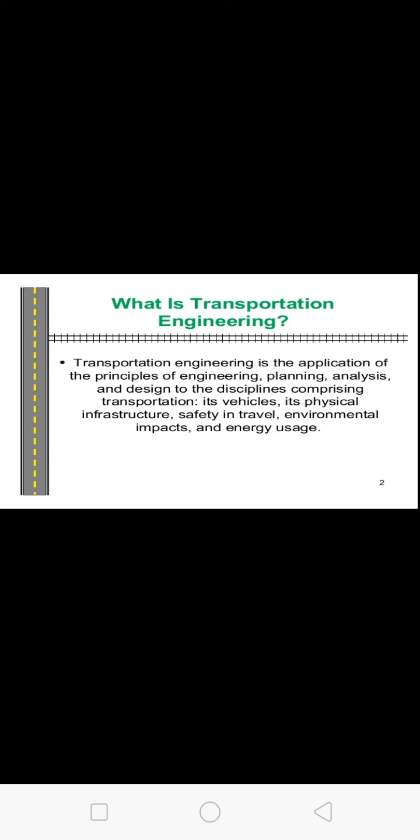Okay, going through here, the role of transportation.

The main role played by transportation is that every product needs to be transported, whether agricultural products or manufactured goods.

Whatever it may be, every product needs to be transported to a certain distance or to particular places.

Next point: better systems can provide easy access and benefits of low costing of products.

If there is no proper transportation or proper route for agricultural farmers or for manufactured goods, and no proper transportation to a particular area, the necessity would be high in that area.

So that will also increase the demand, and where demand and necessity rise, the cost of that good also increases. So a better system can provide easy access and benefit of low costing of products.

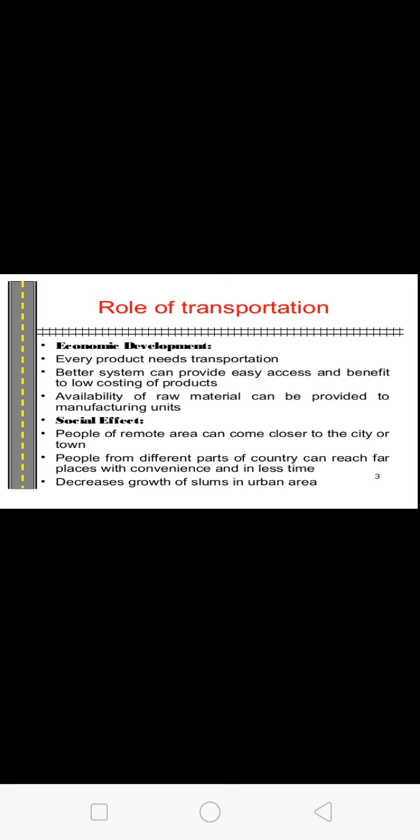Okay, going through other effects of transportation: it helps maintain law and order in the country. Obviously, if there are any discrepancies or clashes between groups or communities, law and order can be easily maintained.

Next, we can supply ammunition and manpower fast and easily. At the borders, for border security forces, if the routes are not proper,

the routes are not sufficient for reaching far distances quickly. If any attacks are made on us and proper routes are not available, it becomes difficult to supply ammunition, gunpowder, firepower, and manpower.

So if transportation is available, whether airways or any other mean of transportation, it allows quick and easy access to carry ammunition and manpower to that particular area when needed.

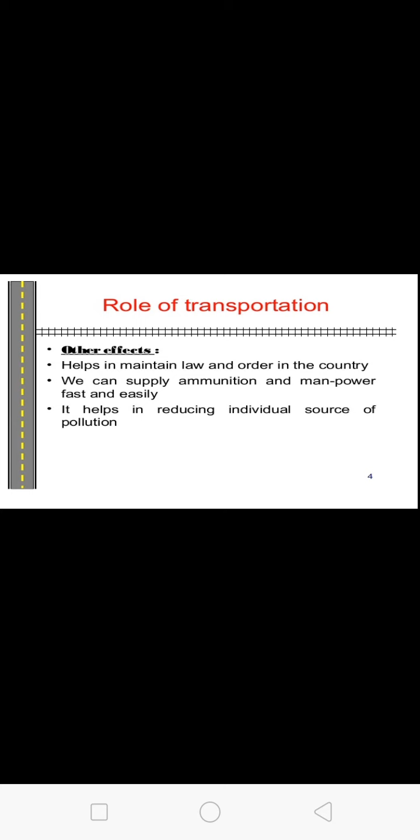Next, going through the role of transportation in national development, and how transportation is useful or plays a key role in national development.

First, economic growth. We can easily access goods or raw materials for manufacturing industries, for agriculture or farmers to sell their goods, or for mini scale industries. So if the transportation is available and made much quicker, there will be an economical growth automatically.

Next, place utility of goods and time utility of goods. Some goods will expire too soon and some may take some time, like processed food products. Consider time utility of goods, like dairy products or daily basis vegetables - they are too soon to expire. If the transportation took too long for sellers to sell their goods, there will be a lot of waste, because the goods will be wasted if transportation took too long for buyers to buy and sellers to sell their products.

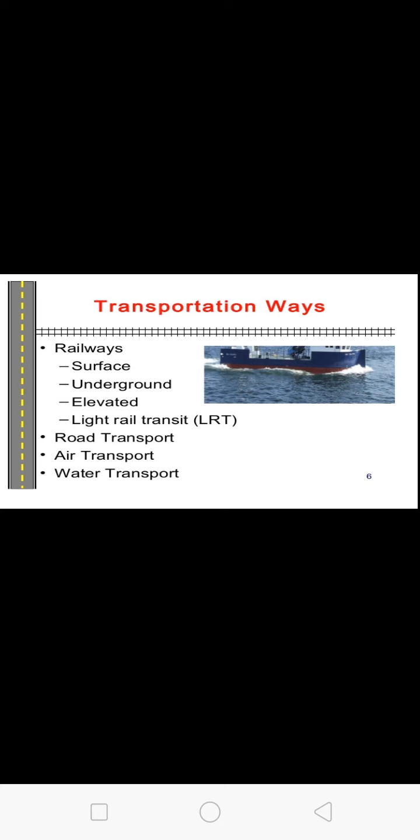Roadways. The classification of roadways are national highways, state highways, major district roads, other district roads, and village roads.

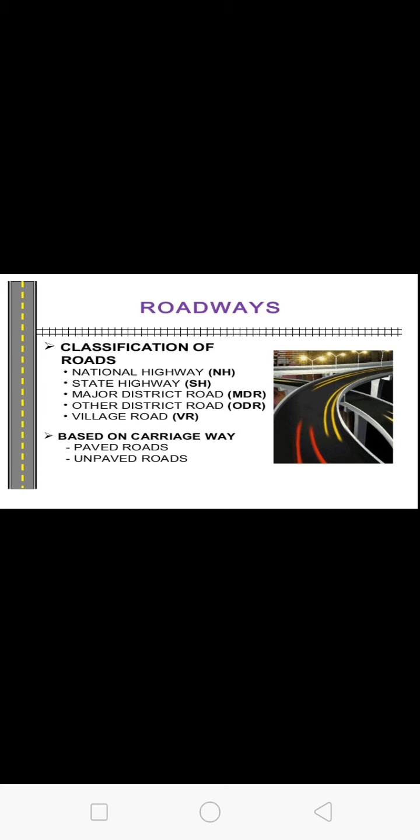Next, national highways. Their main aim is to run through the length and breadth of the country. They connect national capitals to state capitals, major cities or towns, and border areas. National highways should have at least two traffic lanes, excellent strength to carry heavy traffic, and a good surface finishing. The construction and maintenance of these roads is usually carried out by the central government itself.

Next, state highways. These are main roads running within the states. They connect important towns and cities of that particular state with the national highways. These are generally one lane, but two lanes are preferred, same as national highways. They have modern type bituminous or concrete surfacing. The construction and maintenance of these roads is usually carried out by the state government itself.

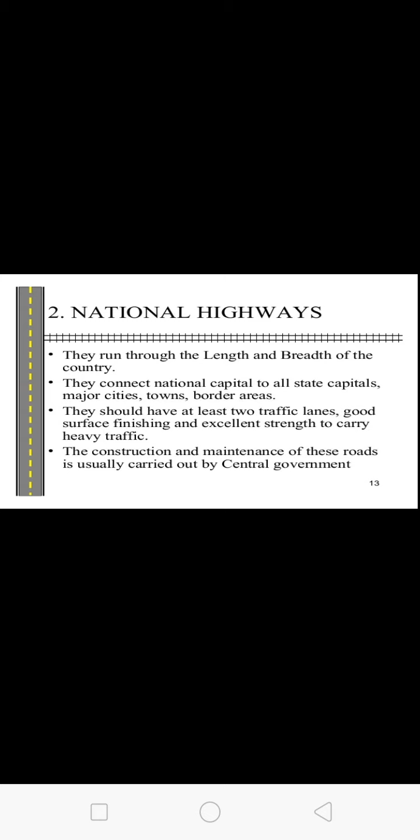Let's go through the national highways again. When we see the national highway milestones, they are marked with yellow and white, which itself describes that it's a national highway. Based on the color of the milestones, we can identify the highway type. For state highways, when roads are constructed or manufactured by the state, green colored milestones are used.

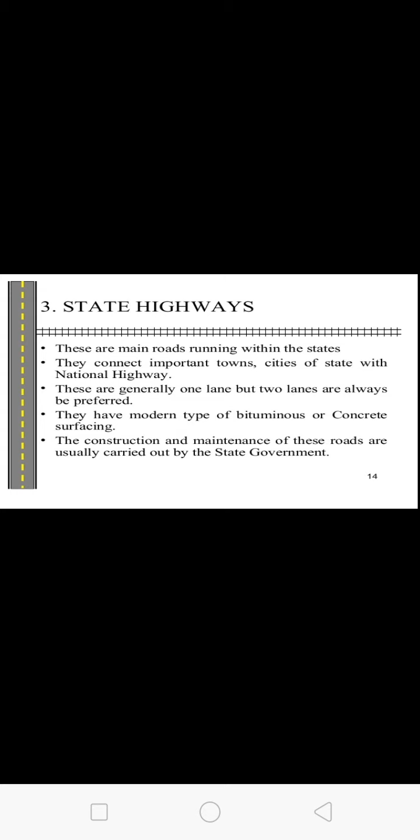Next, going through district roads. These roads connect all the districts, production areas, and markets with the state highways, so they can easily transport goods and raw materials for industrial purposes or daily usage. They have a single metalled lane of traffic. For district roads constructed or manufactured by the states, black and white colored milestones are used.

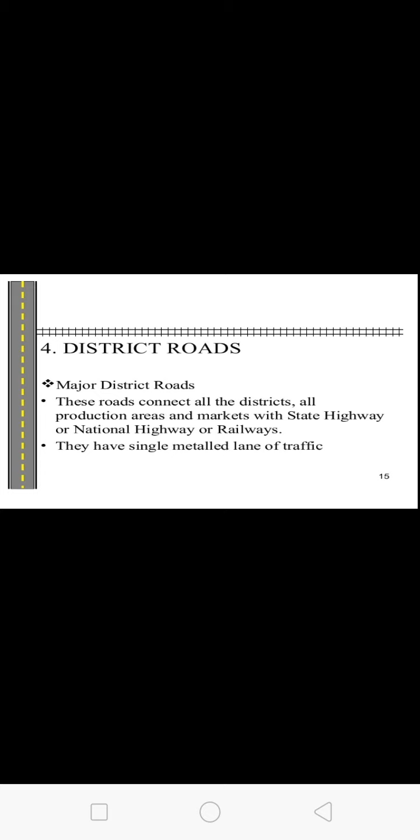One more point: the longest national highway is NH44. It covers a distance of 3745 kilometers from Srinagar to Kanyakumari. And the shortest national highway is NH47A, which is only 5.9 kilometers in distance, covering from Kundanur junction of Maradu in Kochi city to the Kochi port.

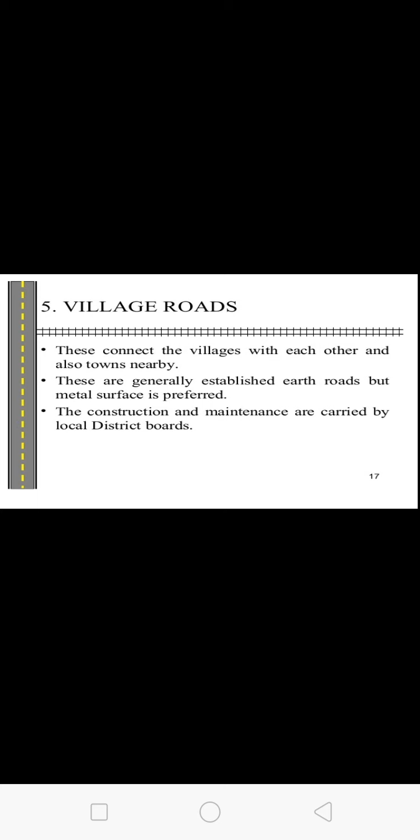Next, going through the roadways which we covered in previous years' topics, like Transportation Engineering 1. In this Transportation Engineering 2, the topics we mainly cover are railways and airways.

We have rails of different gauges, which we can observe in India. What is meant by a gauge? The gauge means the clear minimum horizontal distance between the inner faces of the two rails. It may be of broad gauge or narrow gauge, and that nominal distance between the two rails forming a track is known as a gauge. Let me repeat that again.

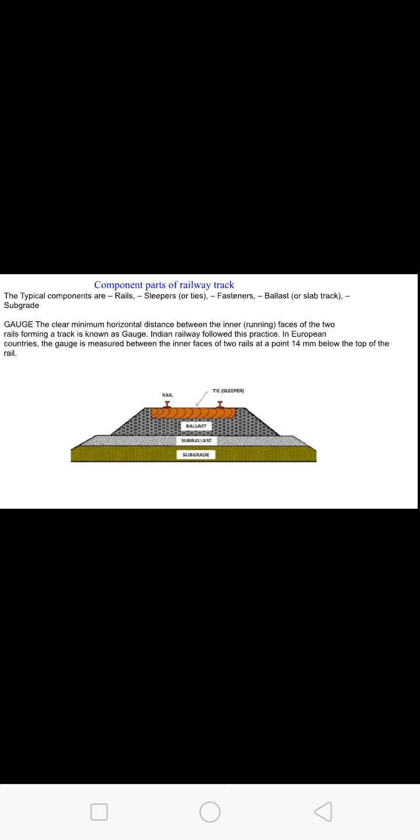What is meant by a gauge? When we consider the two rails of a railway track, the horizontal distance between the inner faces of those two rails forming the track is known as a gauge. Going through broad gauge next.

When the clear horizontal distance between the inner faces of the two parallel rails forming a track is 1.676 meters, or 1676 mm, the gauge is called broad gauge. This gauge is also known as the standard gauge of India. About 50% of railway routes are covered by this standard gauge, meaning broad gauge. The inner to inner minimum horizontal distance between the two rails is 1.676 meters.

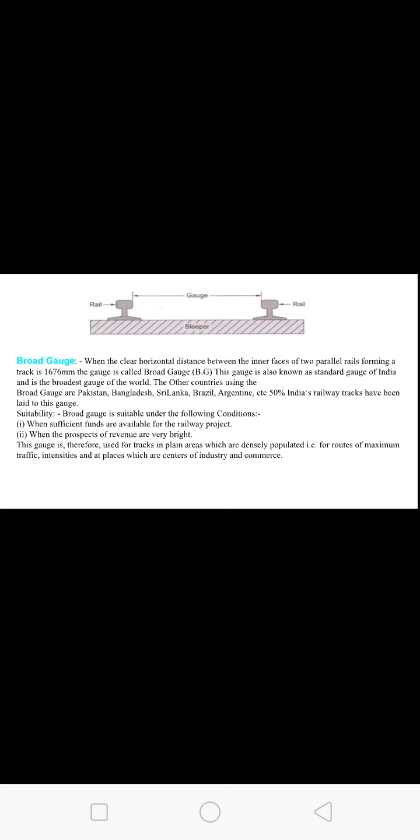The suitability of broad gauge is as follows: it can be used when sufficient funds are available for the railway project, and when the prospects of revenue are very high. This gauge is used for tracks in plain, densely populated areas, for routes of maximum traffic intensity, and at places which are centers of industry and commerce. These standard gauges are mainly used on routes in highly populated and industrial areas and for commercial purposes.

Next, going through meter gauge. Previously we saw broad gauge, where the inner to inner horizontal distance between two rails is 1.676 meters. When coming to meter gauge, the horizontal distance between two rails is 1 meter. This gauge is known as meter gauge.

The suitability of using a meter gauge: when the funds available for the railway project are inadequate, we go for meter gauges instead of broad gauges. When the prospects of revenue are not very bright, we can also go for meter gauge. This gauge is used for tracks in underdeveloped and interior areas where traffic intensity is small and prospects for future development are not very bright. In some rural areas, where for the past 50 years there hasn't been much economic growth or population increase, such routes can be laid with meter gauge, since it's useful for limited, underdeveloped populations.